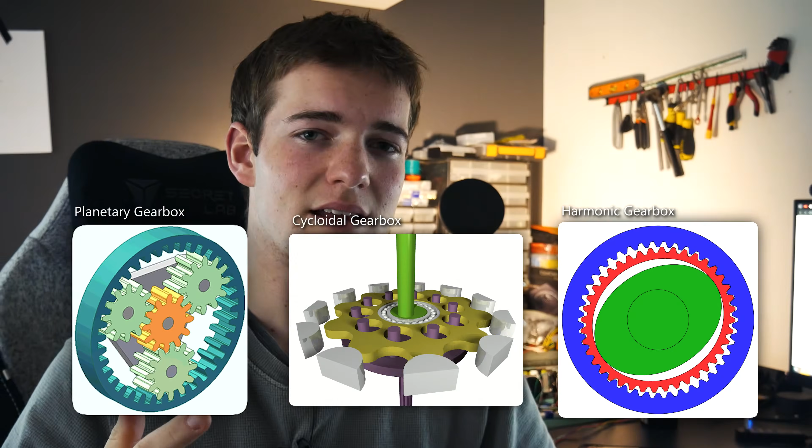When building robots or any system that needs high torque, a gearbox is almost always needed. And amongst the 3 standard gearboxes being planetary, cycloidal and harmonic drives, there's always one that I think stands out, which is cycloidal drives. A cycloidal drive is a gearbox actuator that reduces the input speed in order to increase torque on the output transmission.

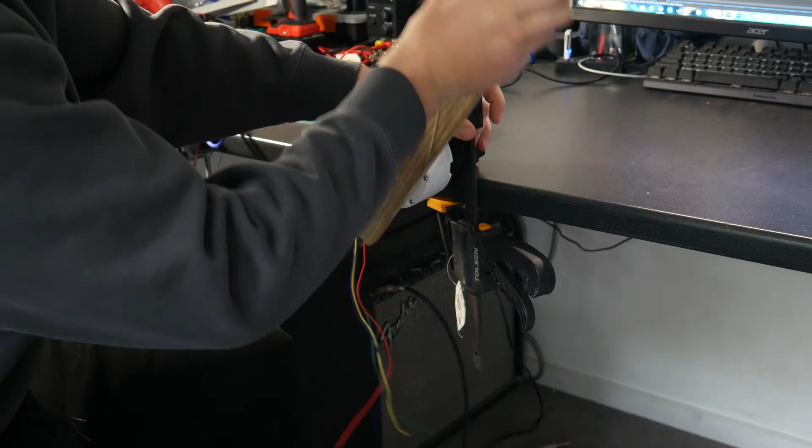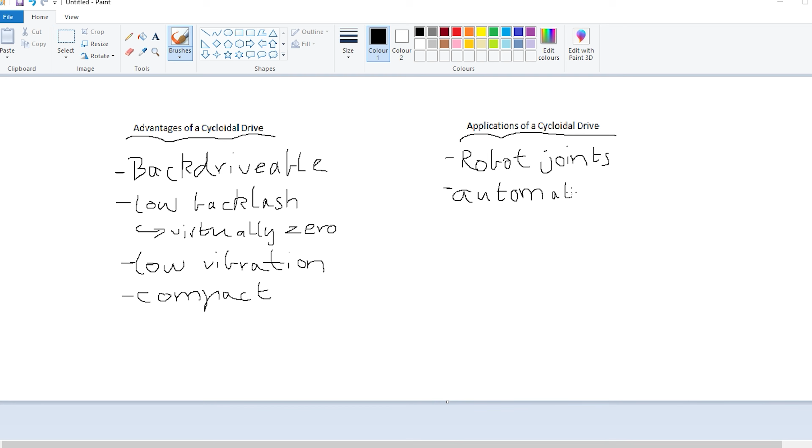This gearbox is known for its features with backdrivability, minimal backlash and in some cases zero backlash, minimal vibration and a pretty compact size. Cycloidal drives are really well suited for applications where backdrivability is useful and where you want as little backlash as possible, but they're also really well suited for basically anything, from robotics to machine tools.

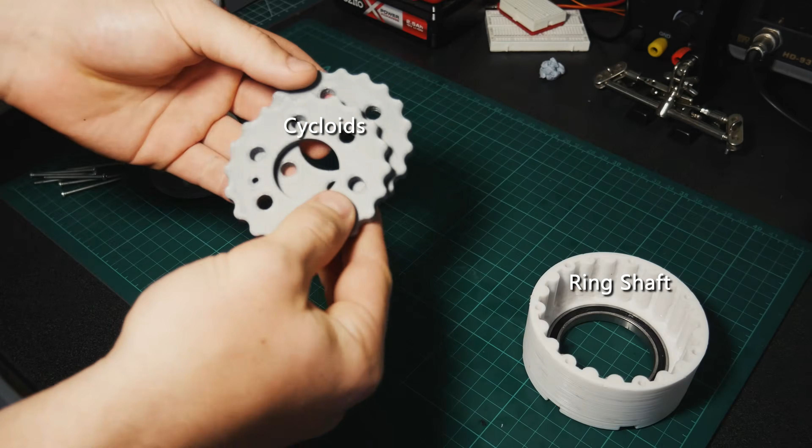The fundamentals of a cycloidal drive are all based around the ring shaft, the actual cycloid, the roller shaft, and the eccentric cams. The cycloid might look like it's spinning like a normal gear, but what's actually happening is that as the eccentric cam input rotates, it pulls the cycloid along with it. But this also pushes the cycloid against a ring of rollers, the ring shaft.

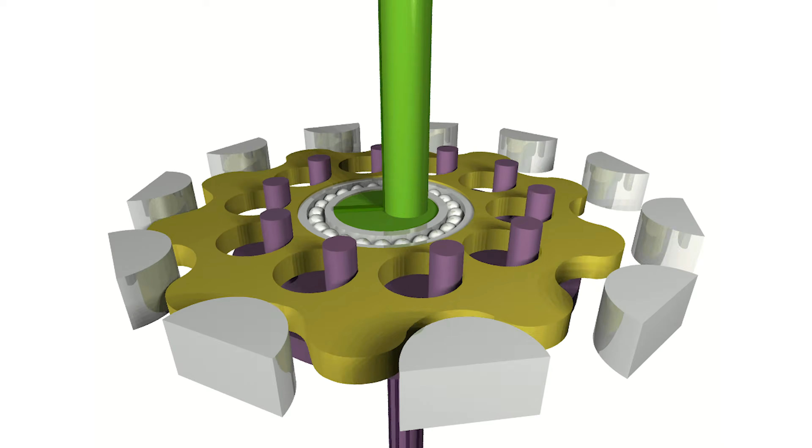And because of the increased number of ring shaft rollers to cycloidal disc lobes, the cycloidal disc is forced to rotate in a weird eccentric cycloidal motion, which then results in driving the output pins, the roller shafts, in the opposite direction of the input at a reduced speed relative to what the reduction ratio is.

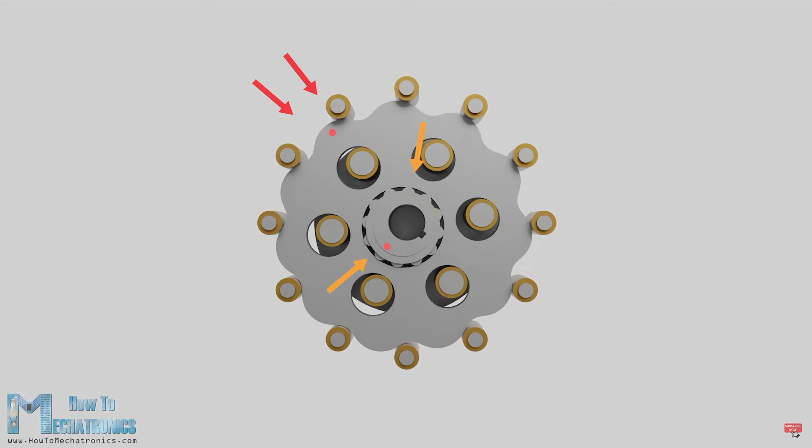For the cycloid to complete a full lap of the ring shaft, the input shaft has to complete a full rotation multiplied by whatever the reduction ratio is. This little model cycloidal drive I have here has a 20:1 reduction ratio. So for this cycloid to complete a full rotation of the ring shaft, the input shaft has to rotate 20 times. I don't know if that was in focus.

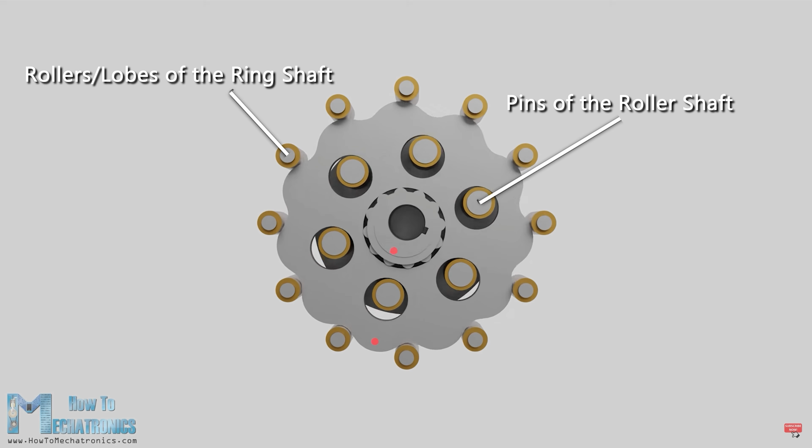Wait, this fucking focus. In doing so, this creates the wiggly little weird motion that the cycloid makes. And with the use of the roller shaft, it can output the rotation of the cycloid into a linear rotating motion, which is something we can actually use.

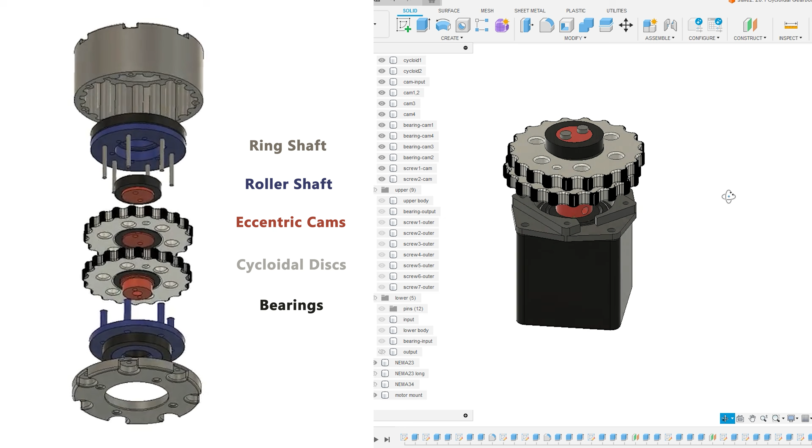So taking apart my cycloidal drive design, there's a gorgeous diagram on the left and a CAD overview on the right, where inside the ring shaft there's the important moving parts, which you're going to have to imagine moving. Taking off the top part of the roller shaft, you can better see the implementation of the roller pins. Now without the roller shaft entirely, there's just the eccentric cams and the attached cycloids, which leaves us with just the cams and the raw dogged motor.

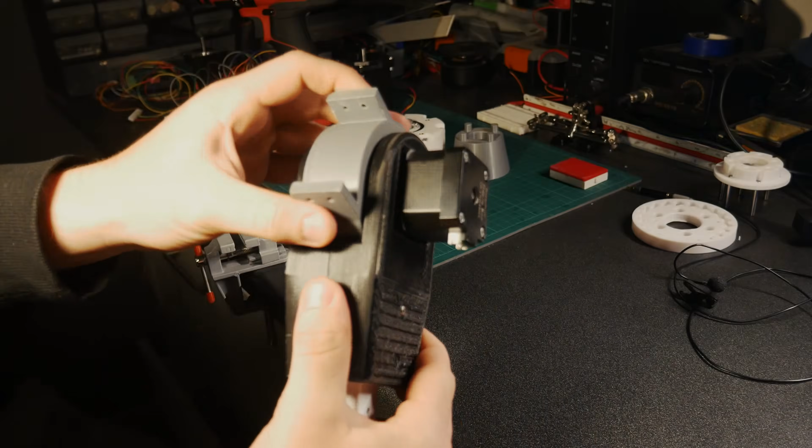In a standard cycloidal drive, the roller shaft works as the gearbox's output and the ring shaft works as a sort of body of the gearbox, as it's physically mounted to the motor's body. Although in some cases these principles are swapped around so that the roller shaft is mounted to the motor's body and the ring shaft plays as the output.

The main difference between these two variations is that the one where the ring shaft is the output causes the output to be closer towards the middle of the actual gearbox, which just means more centred gravity, but it also has restricted motion, whereas the normal cycloidal drive has full 360 range of motion.

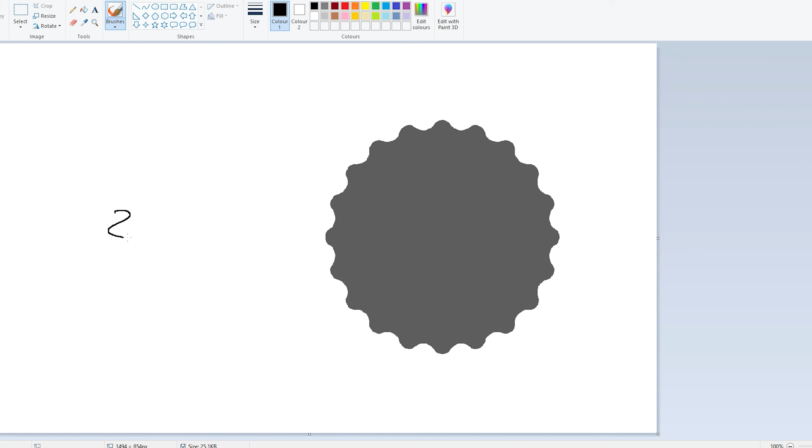Now addressing the motherfucking elephant in the room, which is the gear ratio of one of these motherfuckers. And it's really not that deep, it's just the amount of lobes that are on the cycloid. So for this, I have a 20:1 reduction ratio gearbox, which means that this cycloid has 20 lobes on it. But the ring shaft always has one more lobe than the cycloid. So this 20:1 reduction ratio gearbox has a ring shaft with 21 lobes.

The actual shape of a cycloidal disc is based around the geometry and relations of trochoids, which is a curve traced by a point on a circle's circumference rolling along a line. There are heaps of variations of trochoids, but two of the main relevant ones are epicycloids and epitrochoids. An epicycloid is a curve traced by a point on a circle's circumference rolling along the circumference of another circle.

The other variation of this is the epitrochoid. This is fundamentally the same as an epicycloid, but the point that's traced is a point that's offset from the center of the circle. An epitrochoid is actually what a cycloidal disc is based off of. The shape of a cycloid is actually pretty far from what a cycloidal disc actually looks like. It's more so just like a base shape of a normal trochoid.

To form an epitrochoid, you need parametric equations like the one on screen. Although these equations alone can't complete a cycloidal disc, because if you wanted a cycloidal disc, you need to include parameters like the eccentricity, ring shaft lobes, and roller shaft rollers.

Now obviously the torque output is mostly determined by the actual gear reduction, but there's still a pretty big factor that contributes to the torque output as well, and that's eccentricity. Technically eccentricity is all this and all that shit, but no one gives a fuck about all that. Eccentricity is just the offset of the cycloid and cams from the center of the gearbox. Actually I lied, it's not just that. The curvature of a cycloid is completely relevant with the offset of the cycloid from the center of the gearbox.

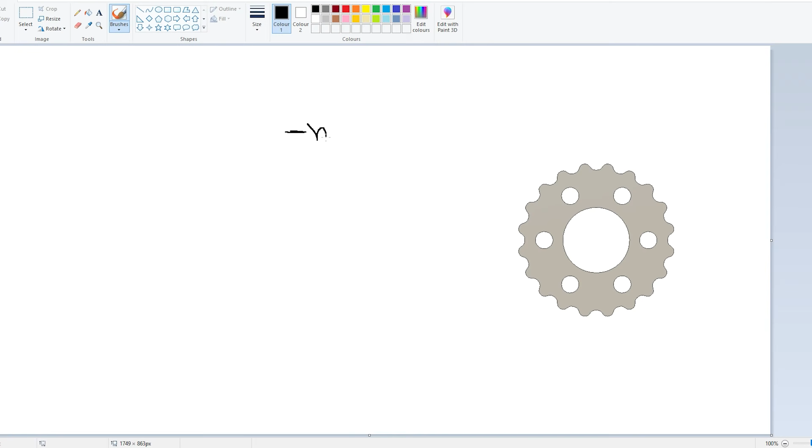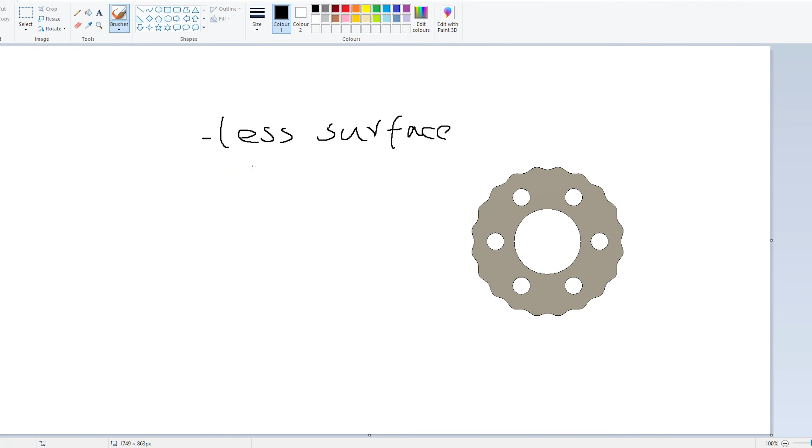And that curvature of the cycloid ties in with the entire gearbox's performance. For example, having a higher eccentricity will technically produce more torque, but because of the higher surface area contact of the higher curvature of the cycloid, it causes unreliability due to friction and just unbalance and just inefficiency. It's just shit. But having too low of an eccentricity can cause the gearbox to just lose torque altogether, and sometimes the gearbox just slips.

So really, you gotta find the eccentricity sweet spot between effective and efficient. And the one I have here is usually a pretty good in between. But as they say, a new year comes a new gearbox. So I thought I'd make the perfect gearbox for your middle class cunts.

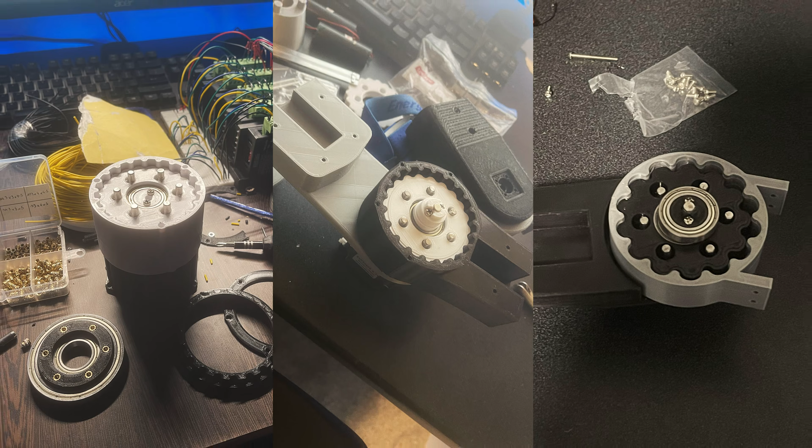This is a 5-axis robot arm, and it's something I made about a year ago. Now, the thing about this robot arm is that each joint operates off of a cycloidal drive, and throughout has about 3 different attempts and iterations of a cycloidal drive, which I physically printed and tested out.

Sketching cycloidal discs in CAD can be pretty tricky for your average fucking Joe. But in saying that, you want to try not to fork the cycloid from any other people's open source projects. Mainly because the whole post-process of designing is way simpler if you know and chose all the actual parameters like eccentricity and offsets, but also so you feel less retarded.

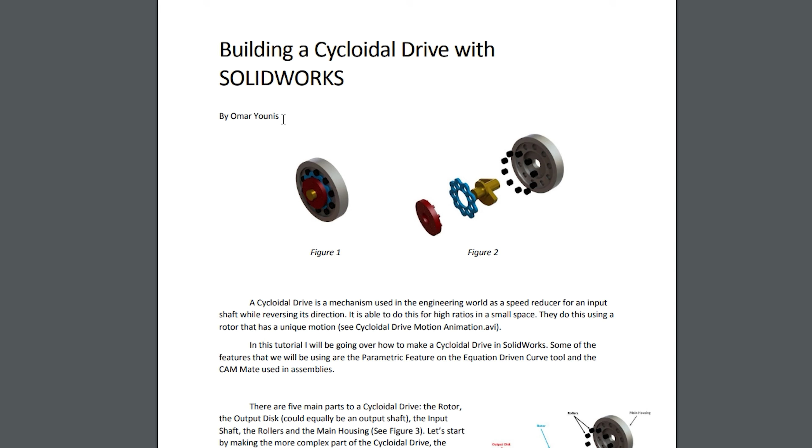After some looking around, I found what looked to be the 2 best ways of properly designing a cycloidal disc in a CAD sketch. I thought I could either manually sketch out each point and angle following Levi Janssen's tutorial, or I could follow this paper on SolidWorks cycloidal drives. Even though it's meant to be made for SolidWorks and its built-in equation-driven curve function, I was really invested in this because I've tried the other way before, the more manual way, and it fucking sucks. It's the age of automation, we need to do better.

Even though I'm stuck with Fusion 360, which for whatever reason doesn't have an equation-driven curve function, you can easily modify the equation, plug in your parameters, and insert it into this Fusion add-on, which I've heard is really useful. All I have to do is download it, and what the f***, it's been removed. After crying for a few days, I found out about this way to plot sort of equation-driven curves using Python with Fusion's custom API add-on system.

Originally, I was trying to make my own Python API code, but trust me, that was not going f***ing anywhere. But eventually, I realized that someone had probably already done this, and big surprise, they had. To design a cycloidal gearbox, you have to download this GitHub file, extract it, and import it into your Fusion 360 scripts in this file directory. When you do this, make sure to drag the cycloidal drive file that's inside of the cycloidal drive file.

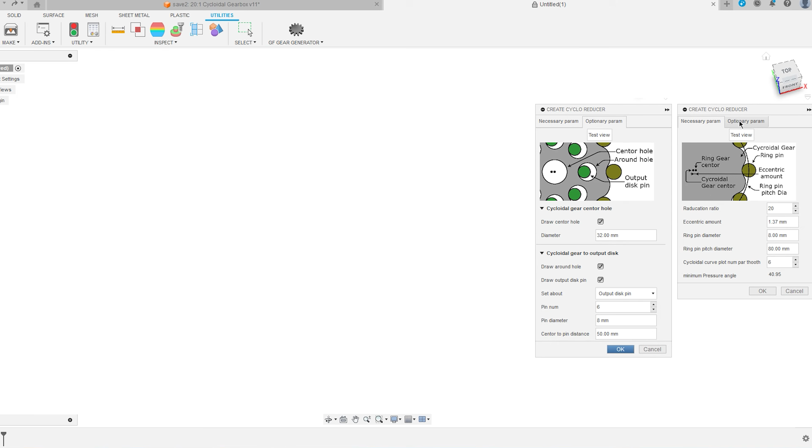Once you've done that, if it hasn't shown up in your Fusion 360 scripts, press the green little plus and select the cycloidal drive file. After you run it, now you can actually plug in your parameters and insert it into your sketch. The parameters on screen are the ones that I have. After you insert and extrude the cycloidal disc, you can start sketching out the roller shaft and the ring shaft for your cycloidal drive.

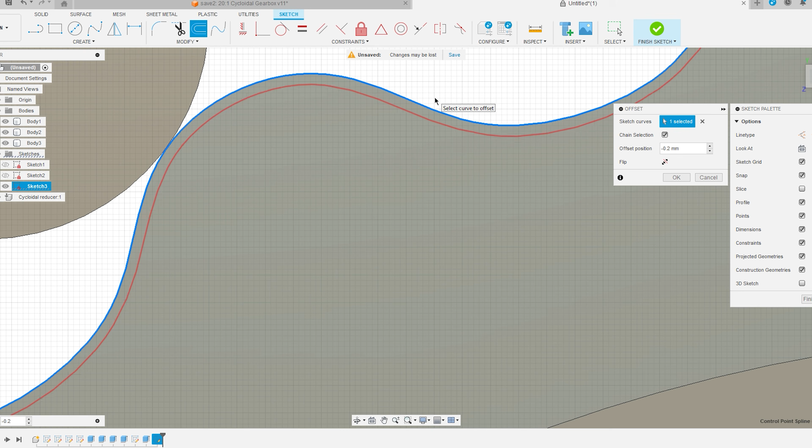Now when scaling all of the moving parts, I've made sure to add just enough room for both clearance and tolerance for the 3D print. I'd say the sweet spot, at least for me, is to have about 0.2ish to 0.4ish mil of space in between the cycloid, the ring shaft, and the pins.

With this gearbox, I'm running a 20:1 reduction ratio, which I think is a pretty fair and standard reduction ratio for cycloidal drives or any gearbox really running with a stepper motor. Before I go any further, we got to discuss budget.

To utilize the maximum and best performance of a cycloidal drive, you need a lot of ball bearings in place of the ring shaft, lobes, and roller shaft pins. This eliminates a lot of performance issues, including friction, that naturally comes with the use of 3D printed parts. Although the issue in doing this is the price, as the cost of bearings can add up really fast.

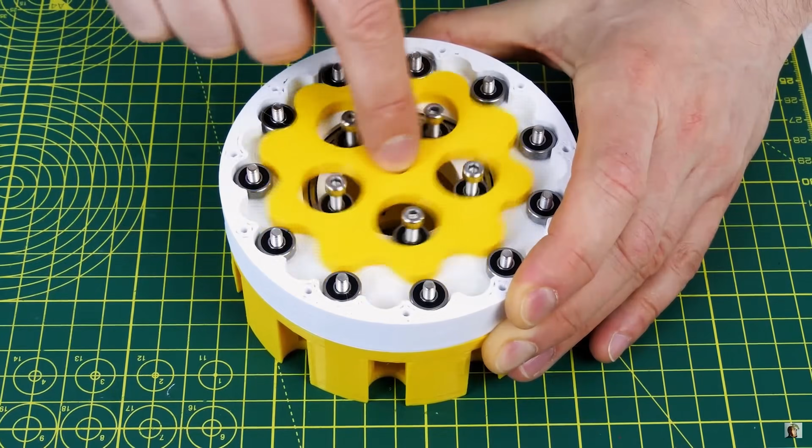And if you're like me and not interested in spending that much money, you might want to consider just simply not using bearings where it's not necessary, like in the ring shaft rollers and the roller shaft pins. But keep in mind, this can cause up to 50% less efficiency. Because I'm not using bearings in the ring shaft or roller shaft, I can still use low friction materials like metal or nylon parts, instead of just simple 3D printed parts.

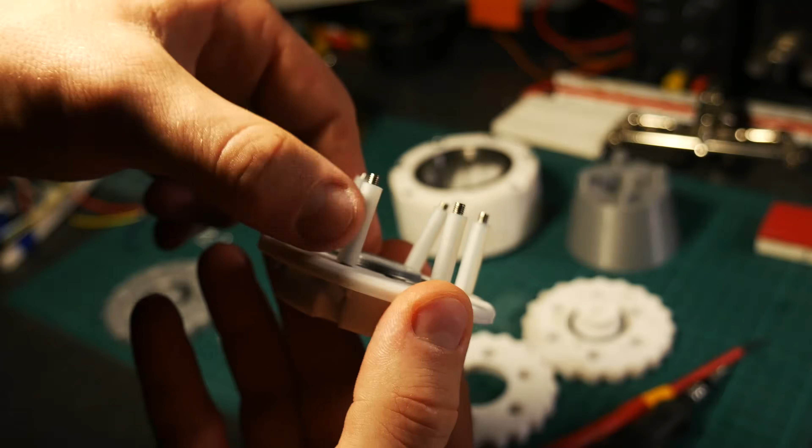For the roller shaft, I'm using 5mm outer diameter and 3mm inner diameter nylon rods that have an M3 screw running through the middle to secure the actual roller shaft in place. But something to keep in mind, and something that I've personally had to deal with, is that if the rods aren't perfectly squared, it'll completely fuck up the gearbox's performance due to the pins being slightly off axis.

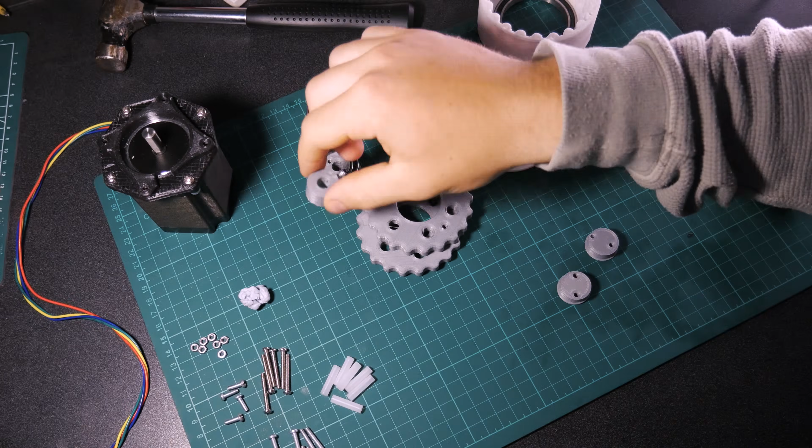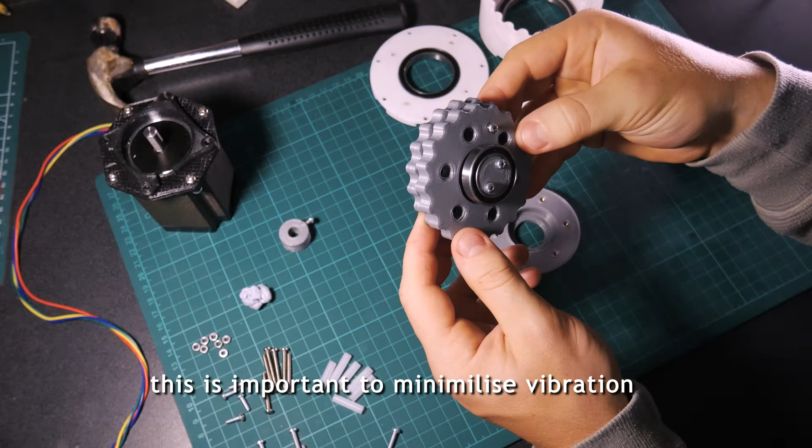These are 8mm thick and the bearings are 7mm thick. So these discs are 180 degrees out of phase, and I've got a little hole so I can just put a screw in temporarily and just keep it lined up. Now we can slide in this bad boy. Okay. I think it's done nice and fair. Alright, so I think that's operating nice and smooth, so we'll chuck it in here.

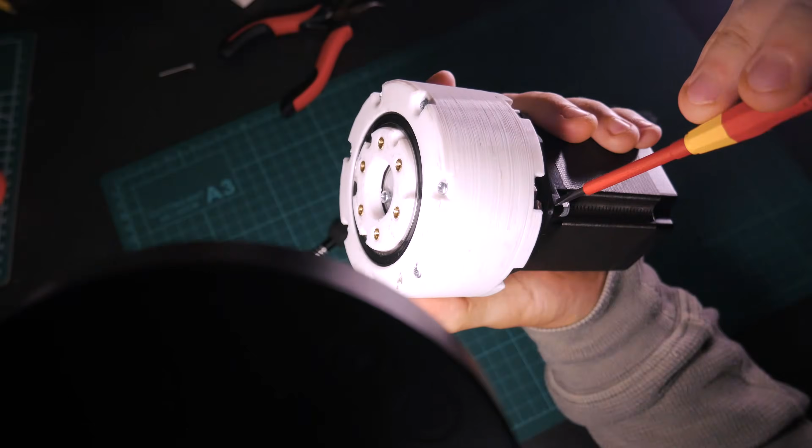It would be way smoother if I added grease, but I'll be doing that later on off camera because it's just a really big pain in the ass. And this is the finished gearbox. Before I do anything else, I'll move the light for this. I want to tighten up the screw keeping the shaft in place.

There is one thing that could be considered a problem: the way that I've designed it and the materials that have been used, you can see a bit of wiggle. And this is partially because of the clearance of the roller shaft, and it's also just because of the bending of the plastic, but that happens when you have a 3D printed gearbox.

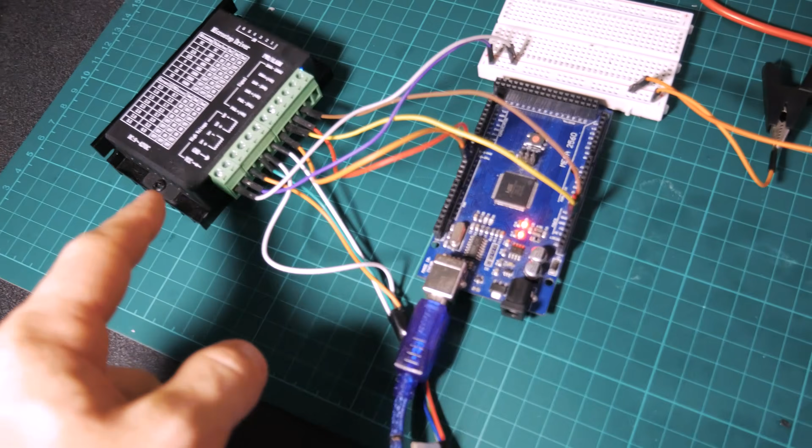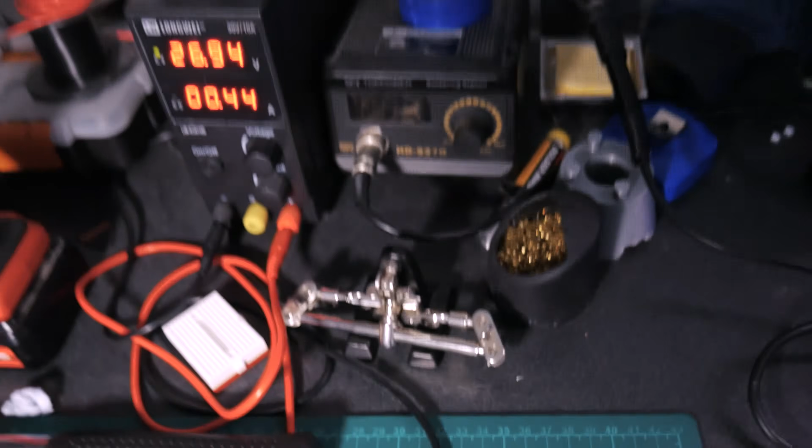Alright, so the little setup we got here, we've got the code running on the laptop, and that's running through the Arduino Mega, which is then hooked up to this TB6600. That's hooked up into my power supply, running off of 26 volts, 27 volts, whatever you want. That's enough yip yap. Let's put it front and center and see how it goes.

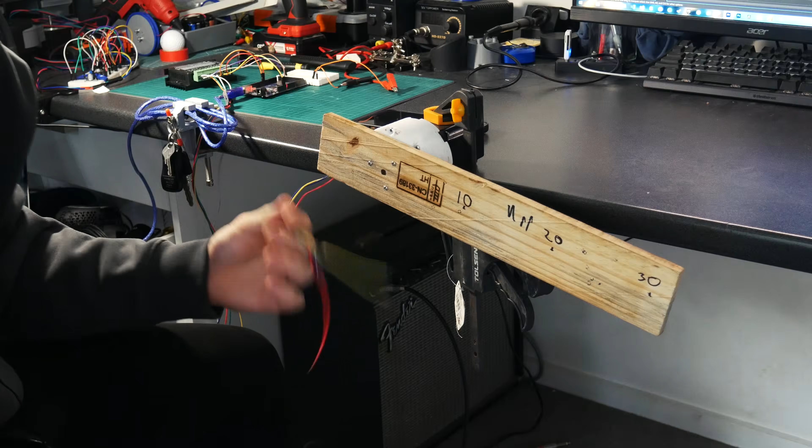What's up, bitches? So here is the magical gearbox, and it's unplugged at the moment completely, and this is just the shaft back driving. It's not terrible, it's pretty good. That's 2 kilos. We're gonna lift it up. Please be the right way, I forgot. It's lifting that alright.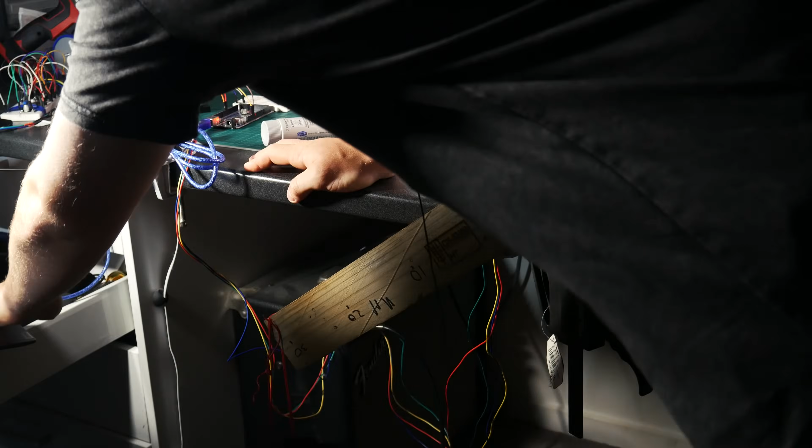3 kilos, we'll run that and see what happens. All good. Okay, let's go. Yep, there you go, okay. It's gonna struggle. That is about to fucking snap and fall on my foot. 4 kilos, let's do it. Don't know what I was expecting. Alright, so we're running 3 kilos again.

Easy. Alright, so that gave us about 10 Newton meters of torque, which is pretty fucking shit. Considering the motor that I'm using is rated at 2 Newton meters, and this gearbox is a 20 to 1 reduction ratio, it should technically be a max of 40 Newton meters. 10 Newton meters of torque, when it should be 40, which is 25% efficiency.